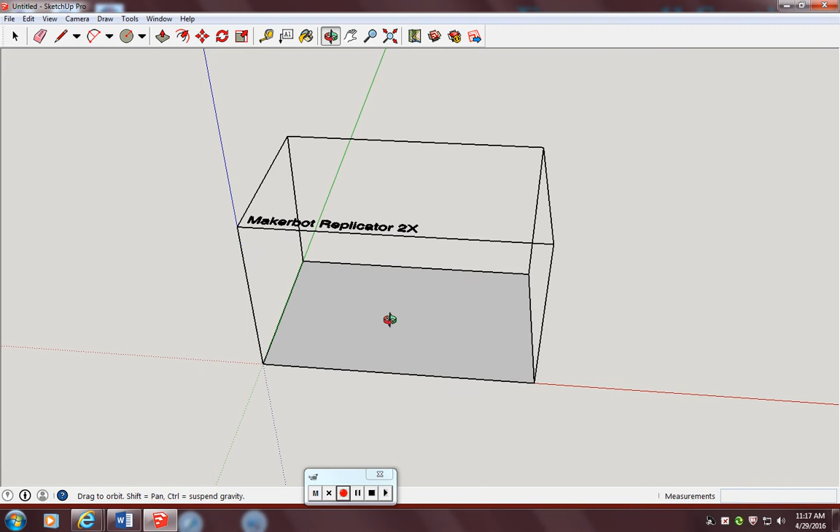The first screen that comes up is this screen here. What I like to do is zoom in, and I like to have my work on... I like to work on the left side of the page.

This icon here, the pan, you can grab it and move your drawing up and down, back and forth. This one right here, which is the orbit, you can click on this and rotate it. A little more challenging to use, but it gives you more power.

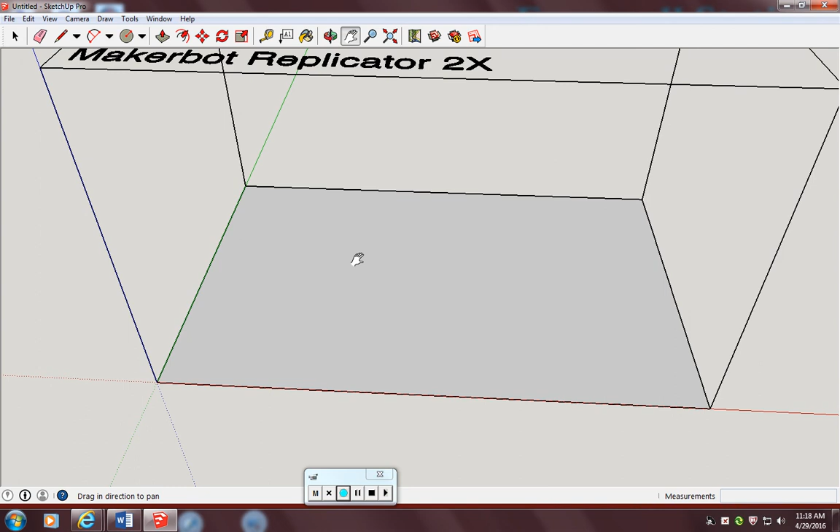Okay, I'm ready to go now. Before you start, there's a MakerBot replicator platform. It's like a box, a transparent box. It's a good idea to get rid of that.

Click on the Select tool up in the upper left-hand corner of your toolbar. Click on this and then hit the Delete key on your keyboard, and you'll delete that. That won't confuse the 3D printer. If you have that saved on your drawing or your keychain, it might confuse the 3D printer and impact its ability to draw or print out your keychain.

First thing you need to do is select the Draw tool, the Line tool. Select Line, click on the origin, drag that along this green axis. What I like to do, if you look in the lower right-hand corner, you'll see a length box. Watch me type in 3 in that box on the keyboard, and then I'm going to hit return. Notice that SketchUp automatically draws a 3-inch line.

I'm going to draw along the red axis, and if your line's red or green, that means it's a 90-degree angle to the line you're drawing from. So I want a 90-degree angle up here, and I'm going to make that 1.5. Look down in the right-hand corner of the screen, you'll see 1.5. I'll type that in, hit the enter key, and it draws a line that's exactly 1.5 inches long.

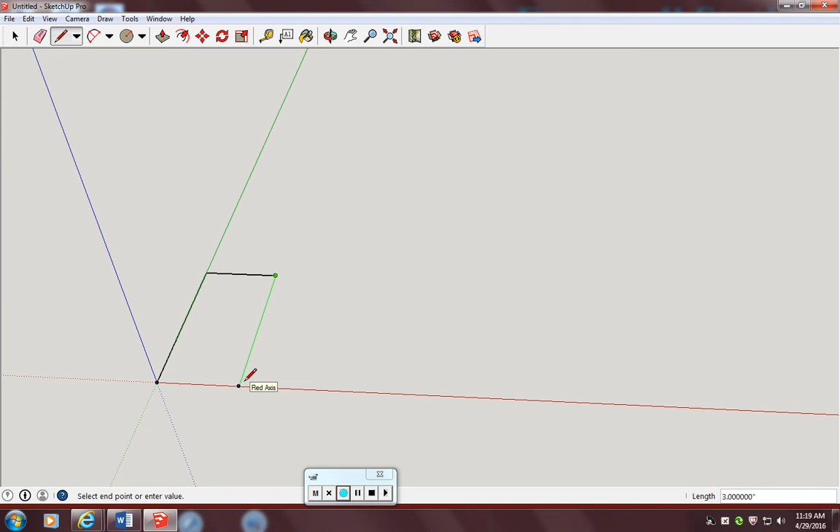Come down here, remember it's got to be green. It's up to you if you want to make an irregular shape or a regular polygon, that's fine. You have some freedom to design whatever shape you want as a keychain. I like to, for purposes of demonstration, just draw a rectangle.

Click on the red axis and drag this over. Click on the origin or the endpoint, and there's your shape. It's a two-dimensional shape now, and because it's shaded, it indicates that all those lines are closed.

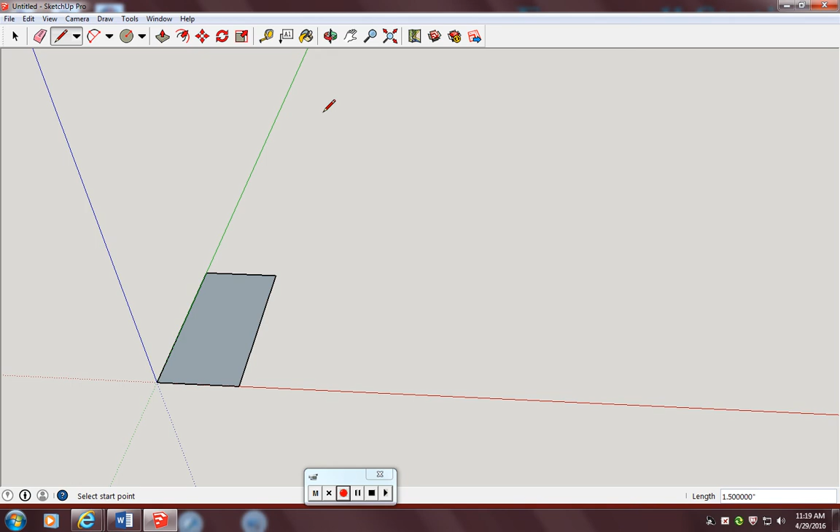Now I click the Select tool. I'm going to zoom in here, and I'm going to use the Orbit command, and tilt this a little bit. What I'm going to do now is put a decorative edge on both sides, or a radius on both ends.

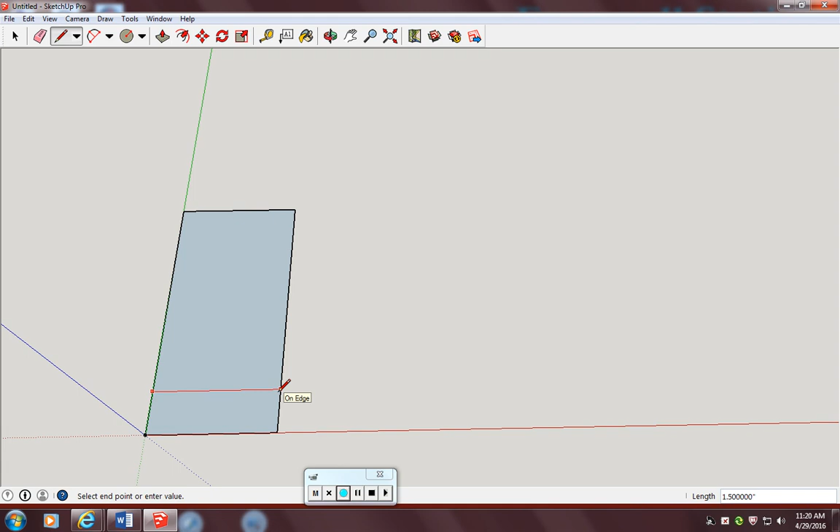So what I'm going to do is click Lines, and I'll eyeball right up down about 1/6 of the distance from the origin. I'm going to draw a line across. And I'm going to do the same thing up here, come down, and draw a line across.

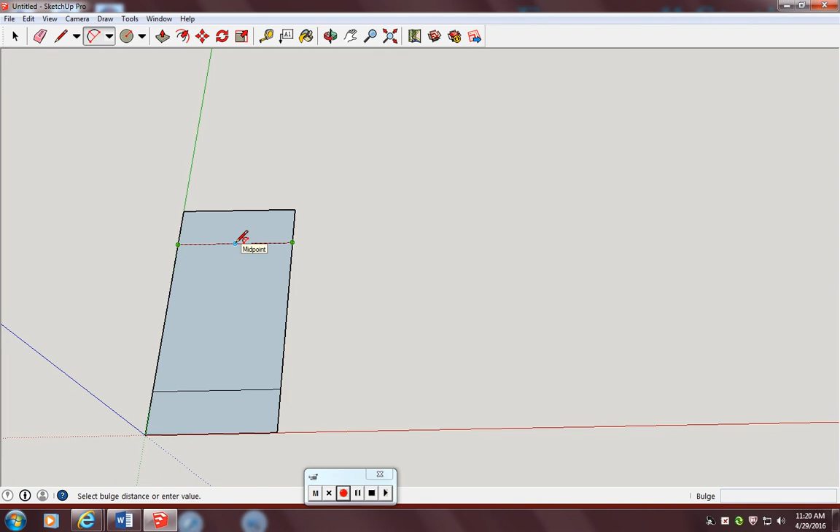Now I'm going to put an arc on both those ends. I come up here in the menu bar and hit the 2-point arc tool. Click on the endpoint here, click on the other endpoint. Now you don't click on the middle - that's the midpoint, highlighted in blue there. I don't click on that, I just drag the mouse out to the end of the rectangle.

Do the same thing down here. You click on each endpoint, and then you come to the midpoint and don't click but drag, and then click. Now I've got my radius on there and on each end.

Now I'm going to delete this section of the drawing I don't need. You want to get rid of all these excess lines, because if you don't, the 3D printer is going to be confused trying to print those. So I'm going to delete these, and then we'll be able to continue on with our drawing.

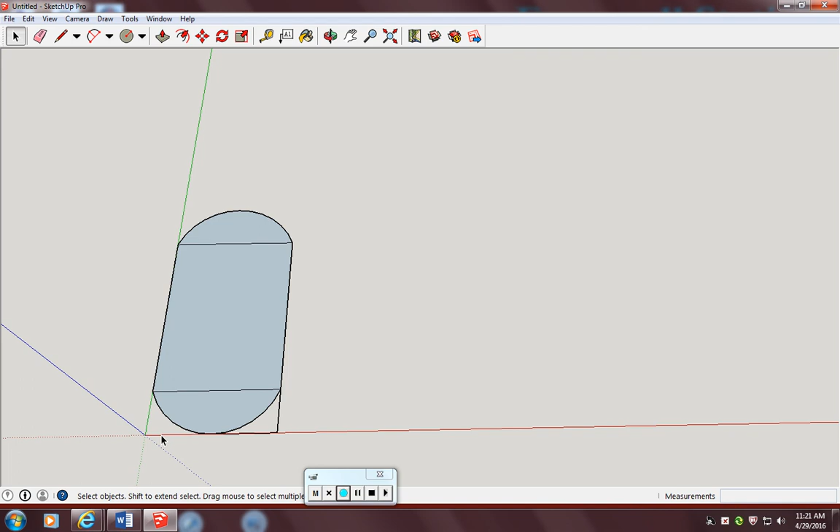By the way, to delete it, you just click on it. It should be highlighted blue, and then you hit the delete key. Now I'm going to delete this line right here.

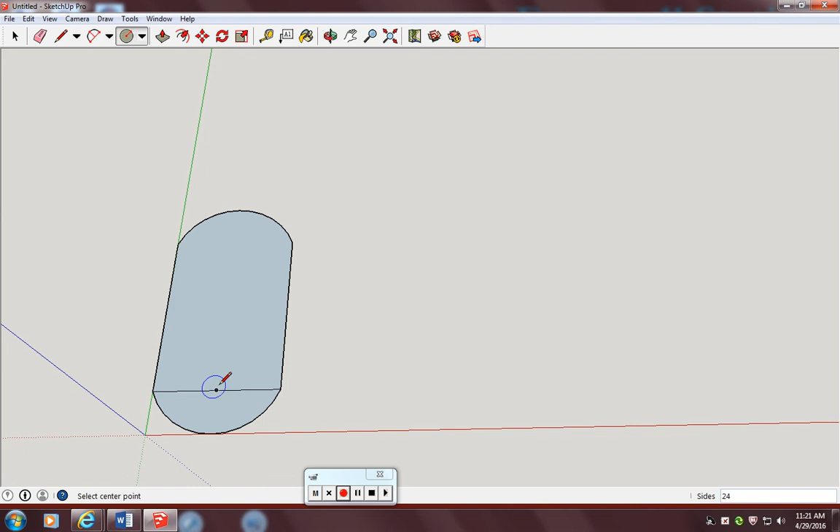On every keychain, you have to attach the keys, so I need a circle. I'm going to need to find a midpoint - there it is. And I'm going to expand that circle by clicking on it and then dragging, and then I'm going to click there.

Now I'm going to delete all the lines associated with making the arc and also making that circle. The last thing I have to do with this two-dimensional shape is to delete that circle. Boom. Now remember, I have a two-dimensional shape.

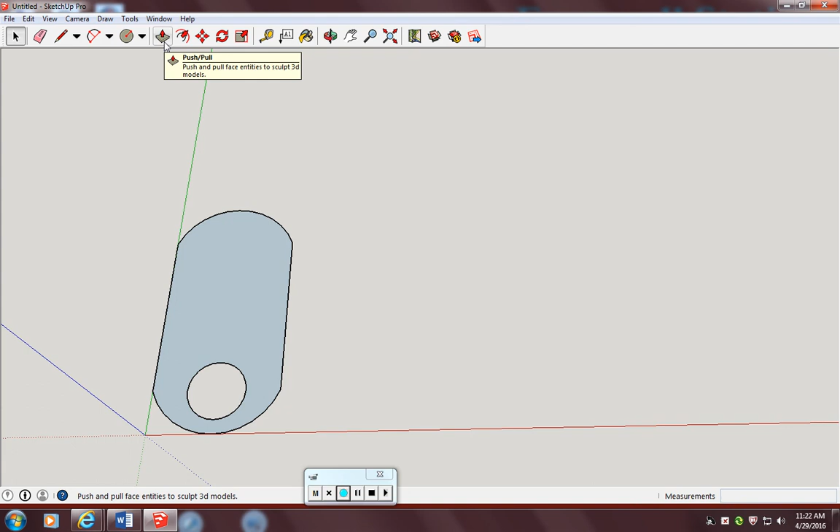I want to give it depth, so I click on this tool up here - it's a push-pull. Click on it, and then you just drag the mouse back and forth. You can add depth to it.

Now if you look down in the lower right corner, I'm going to give it 0.1 or 1/10 of an inch, make it that thick. That'll be fine for purposes of this demonstration. It's up to you how thick you want to make it, but remember, if you make it too thick, it's going to use a lot of filament to print out. Okay, once you've done that, I've got a 3D image.

One thing you should do is look at the backside or the underneath, and it's solid. If yours is hollow, then you've done something wrong. You need to go back and redo it. I would recommend starting over from the beginning.

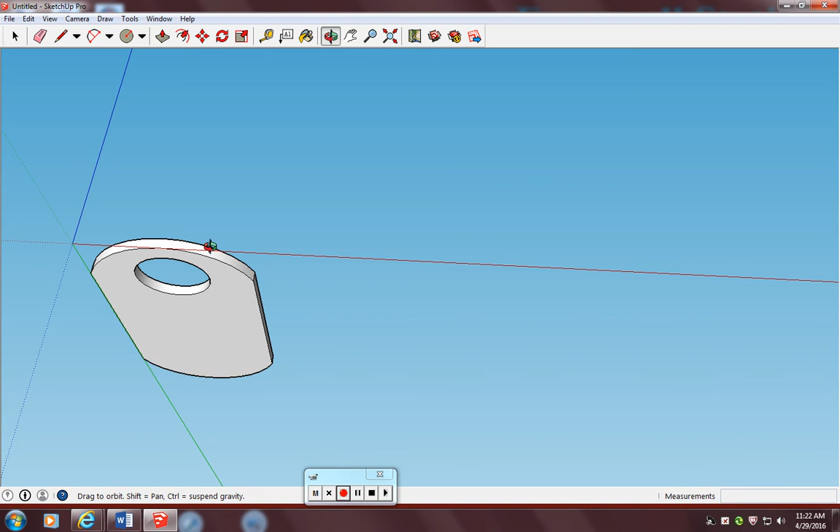Okay, we're good there. Now I want to put a decorative edge on there. Of course, you have a lot of freedom to do whatever you want with the shape and also whatever additions you put on here. Let me just show you how to put a decorative edge.

You come over here to the offset tool, click on that, click on the surface of the keychain and just drag it in. Now, if you look in the lower right corner it says distance - I'm going to put 0.05, and that looks like a nice distance. You might want to experiment with different distances.

Come over here and give it some depth by clicking on the push-pull tool. Come in here and then bring this up. Guess what, 0.1 - it returned. Now actually that looks a little too high.

So what I'm going to do is come down here to the keyboard and hold the control key down and hit Z. That eliminates that last step. I'm going to do the same thing - I'll go 0.05, return, and that looks a little better right there.

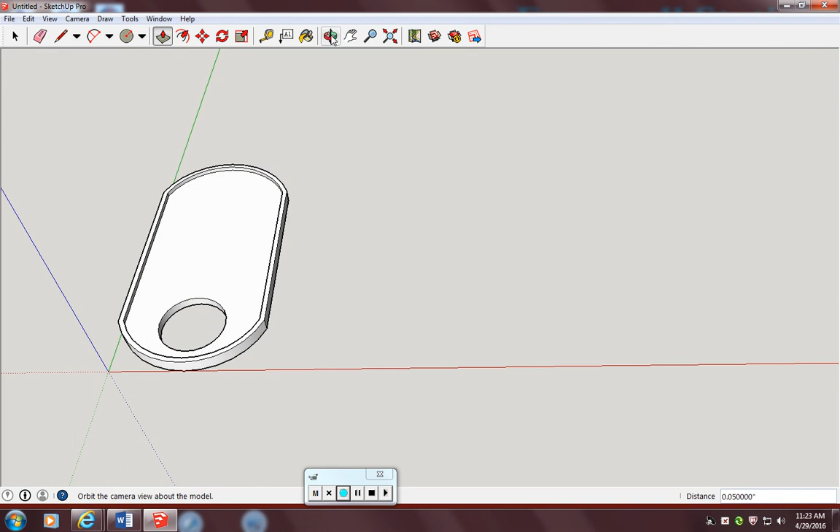Now the last thing I need to do is put some text on there. In order to put text on, I'm just going to use the orbit tool to move it around a little bit here. That looks right there, so I can show you a little better.

I'm going to come up to the Tools command, click on that, and come down here to 3D text. There it is. Now it's really important that you select a good font - a good font is one that is thick.

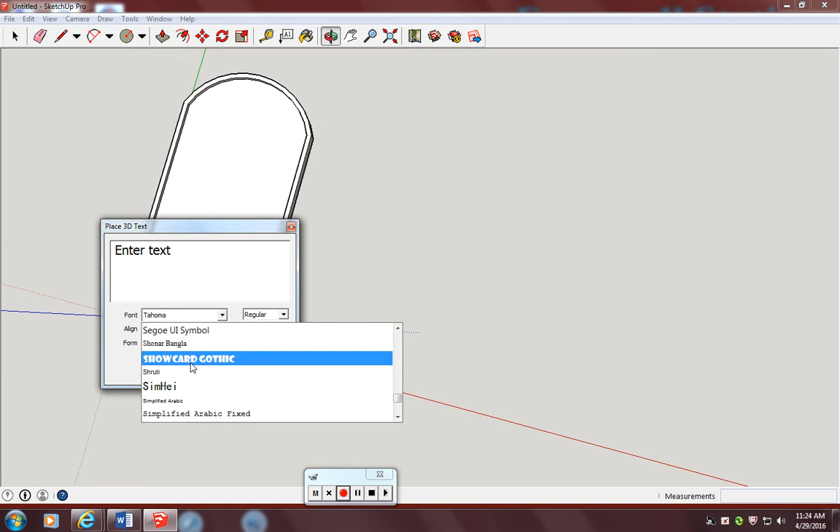And we're going to go through here. Stencil looks okay, that Snap has possibilities. Now that Showcard Gothic looks like a good one. Anything that's thick will come out better on the 3D printer. I like Rockwell Extra Bold, I'm going to click on that one.

Now you want to set the height initially to 0.1, and both of these settings should be set to 0.1 initially. All right, and then I'm going to change this. Let's try putting on here 'hall pass,' because frequently I use these for hall passes.

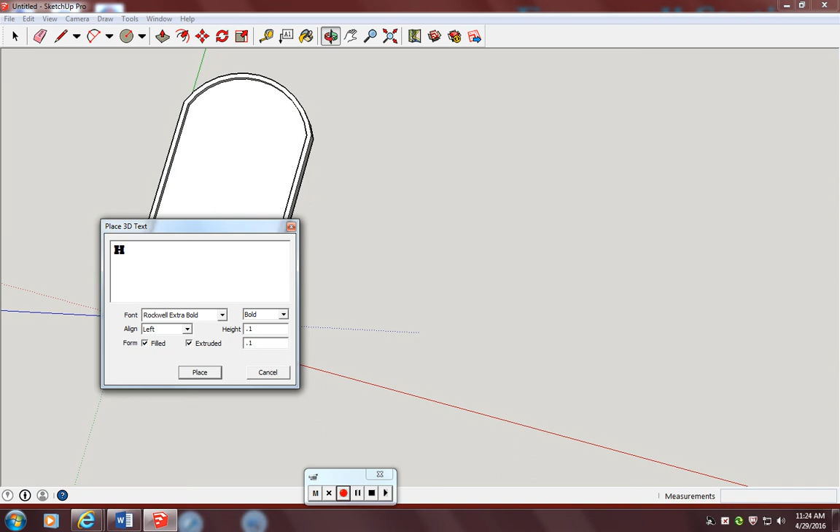And then I hit place, and you can see that's too small. So for this size keychain, those settings of 0.1 and 0.1 are too small. So what I'm going to do is hit Control Z and delete that, and go back and try again with a change in settings.

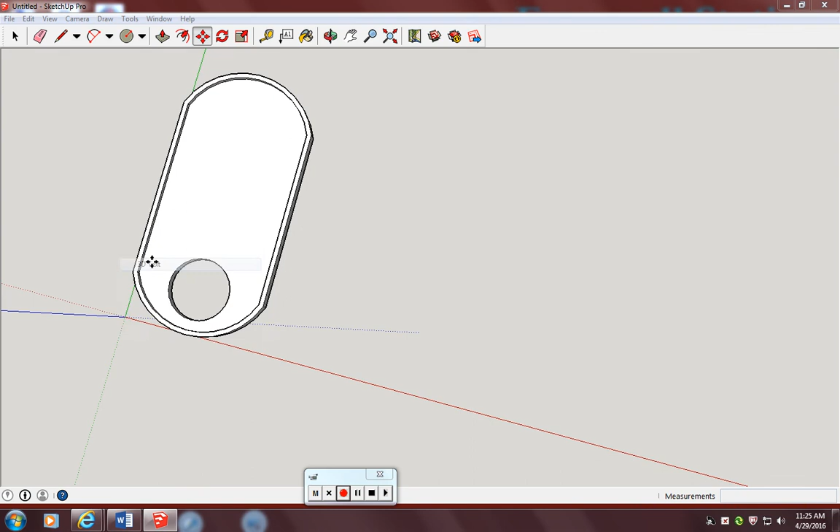Let's go back here and try 0.2, and we'll leave 0.1, and we'll try this. Let me just leave 'enter text' on there so we don't spend too much time with stuff you guys already know how to do. So that looks like a pretty good setting. You'll notice that on a 3-inch keychain, if I change the top setting to 0.2 and keep the bottom one at 0.1, it comes out compatible with this size keychain.

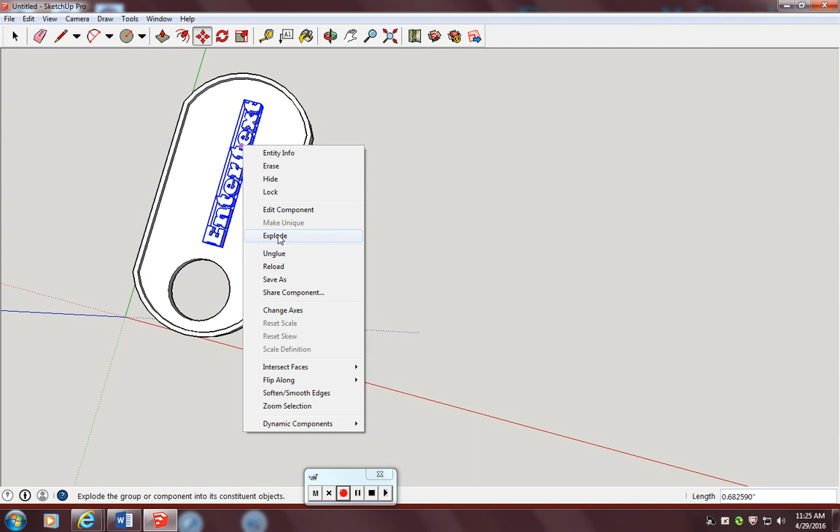Now it's very important that you weld this text to the keychain. Right now it's not attached, it's separate. To weld it, you right click on it and come down here where it says explode, and click on explode. Now it's welded on. And I just click on, there you go. You can see the end product here.

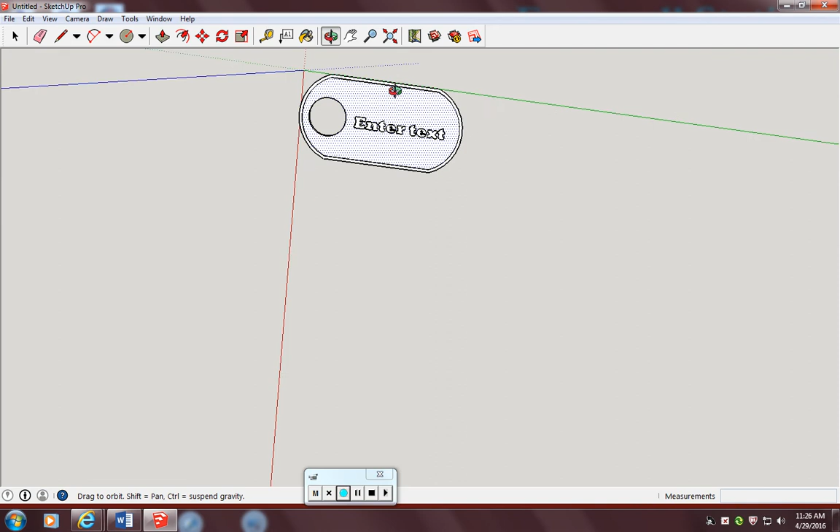Now this is just a basic keychain. Let me see if I can flip it around here so you can see a little bit better. This is a basic keychain. I'm going to zoom out and flip it on here.

There you go. It's a little tricky to use this orbit tool, but you can see that that's pretty basic. So you have the option to change the shape of this, the size of this circle, the text you put on here, whether you want to put a raised edge on the outside. So there are a lot of options you can do, and I would recommend going in and experimenting with these different settings and coming up with something unique.

The last thing we need to do is save this to your My Documents, and then you also need to convert it to an STL file. If we come over here, you'll notice that it says export. This in its present form is not—you can't 3D print this.

It has to be converted from an SKP file. So if I save this and go into My Documents, you'll notice that the extension is SKP. We need to save this as an STL file that the 3D printer recognizes.

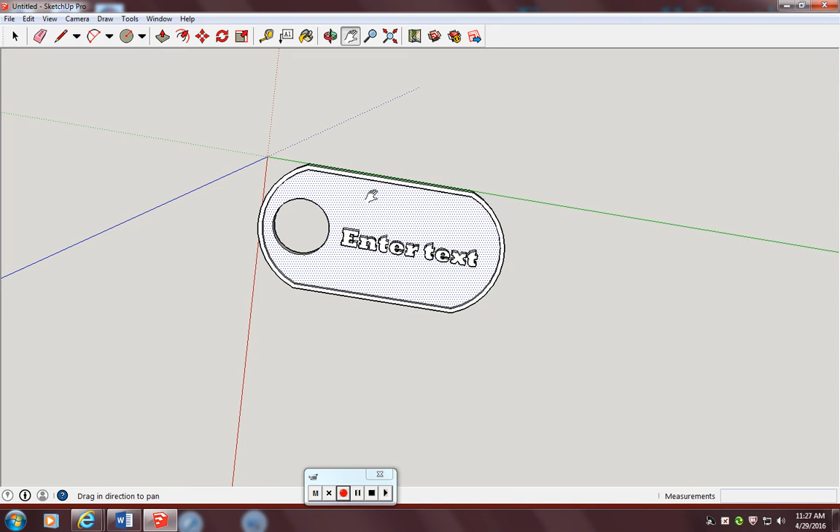In order to do that, we come up here, and this is very important. On the menu bar, you'll see a command, an icon for Extension Warehouse. Click on that, and then click on SketchUp STL. You can see that it's at the top because it's very popular.

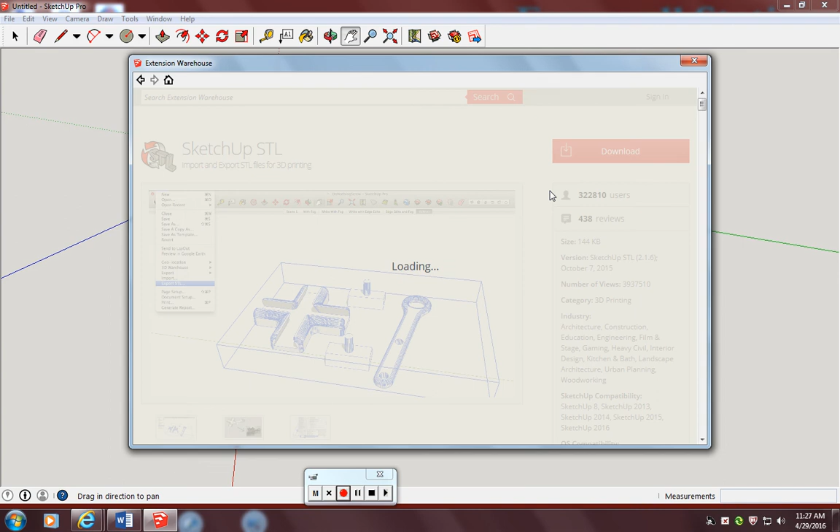This is going to load a translator that will convert the SKP language to a language that the 3D printer can understand. Then when you type in your Google address for the school, you can even type in the one from home, and then you go through the process. It'll load that patch for you.

Once you're done loading that, when you come over here to File, you'll see a command here instead of export—it'll say Export STL. And then you export it as an STL into your My Documents, and then you'll be able to send that to the 3D printer, which in turn will be able to print that.

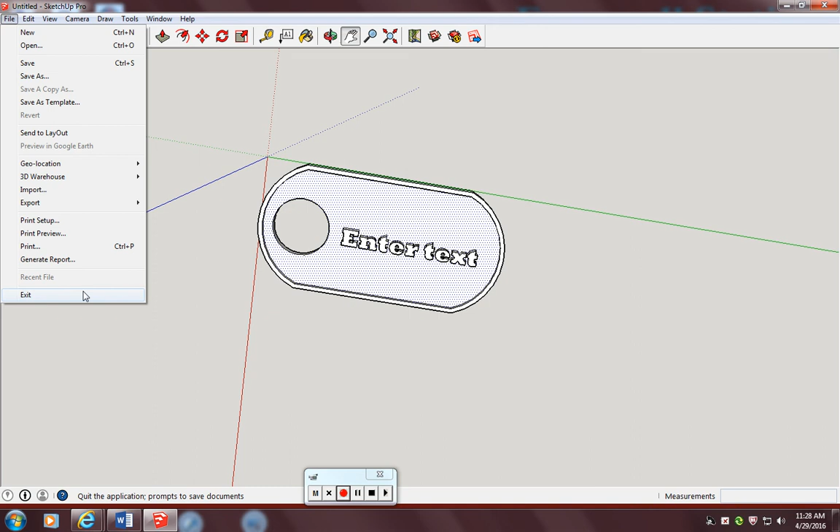If you have any questions, you just need to ask your teacher. And that's basically how you do the keychain. Good luck.